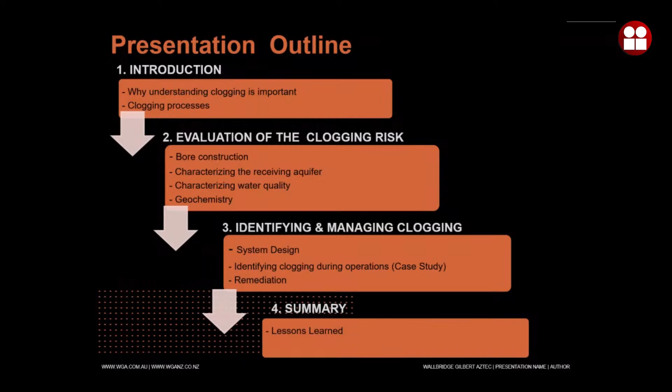The second part will be the evaluation of the clogging risk. Now, clogging risks, we talk about bore construction, making sure we can characterise the receiving aquifer properly, characterising water quality and some geochemistry elements.

Identifying and managing clogging, system design and identifying clogging during operations, and steps for remediation once clogging occurs, and then finally just a bit of a summary of what we've been through.

And why is that changing my slide? Right, for the introduction,

Why is understanding clogging important? Basically, clogging can cause impaired recharge capacity and restricts the volume of water that infiltrates or can be injected to the target aquifer. Severe clogging in infiltration basins or injection bores may need to be replaced, and it's the biggest risk to the successful operation of any managed aquifer recharge system.

What I should have mentioned is that most of this topic will be on clogging in recharge bores. Clogging in infiltration basins is a whole topic of its own.

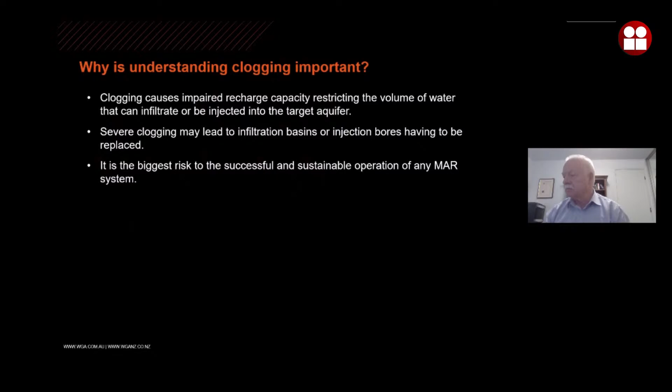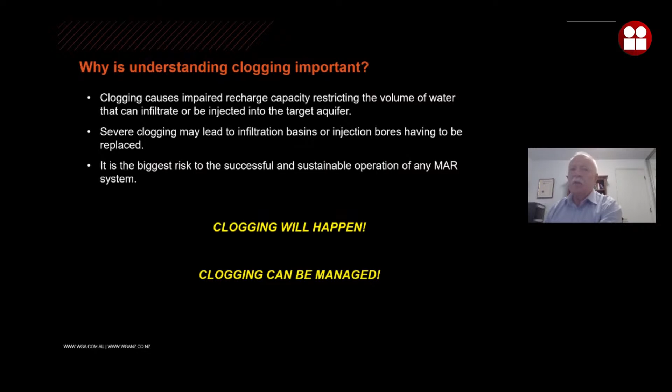Now, clogging will happen. We can be sure of that during the life cycle of a managed aquifer recharge project. But the good thing is clogging actually can be managed. There's a variety of different types of clogging, and I just want to step through each one in particular.

So physical clogging - one of the least appreciated mechanisms is velocity-induced damage, which is migration of the small interstitial fines that occupy the pore spaces within a sand aquifer or another type of aquifer. Under certain flow regimes and high velocity, these fines can actually break off and become mobilised and flow through the aquifer system.

Whilst it's not a problem perhaps while injection is occurring, when injection actually stops, these fines tend to sink to the bottom of the pores, and then when you remobilise injection, they mobilise as a clump and end up being blocked in the small pore spaces, resulting in clogging. It's probably one of the more difficult mechanisms to remediate, but we can put measures in place to control that a little bit better, and I'll talk about that in section 3.

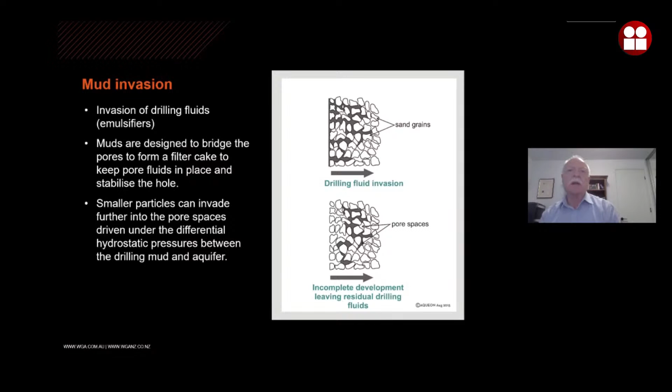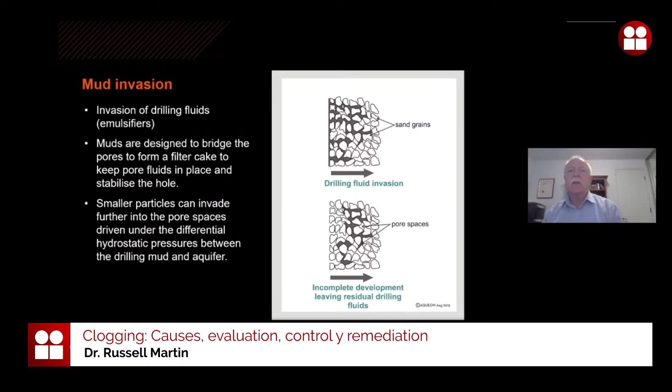Mud invasion, again, probably underrated in terms of a clogging mechanism. Muds are designed to bridge the pores and form a filter cake during drilling and keep the hole open and stable. But it's critical that they're actually removed prior to developing the well, and there's different mechanisms to remove them. If your mud weights and your mud viscosity are not correct when you're drilling a hole using mud chemicals, then they can actually invade out into the pore spaces, several meters or more, particularly if you have a very permeable formation.

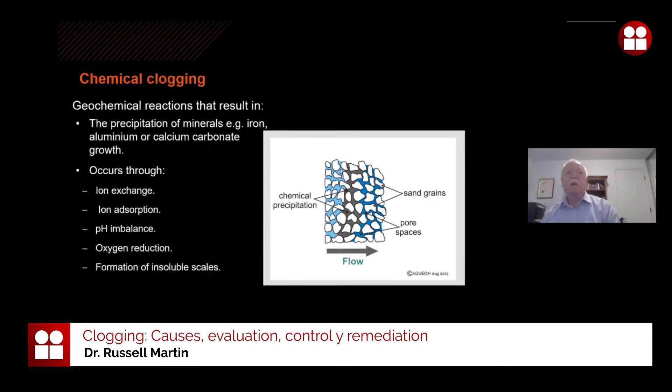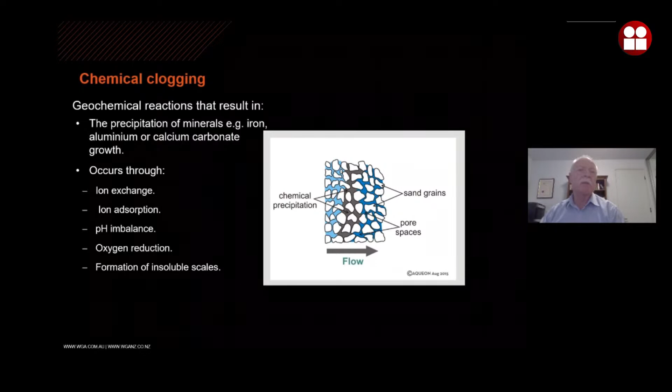Geochemical reactions result in chemical clogging, one of the third mechanisms we can experience in a managed aquifer recharge project. Typically it's precipitation of minerals like iron, aluminium, calcium carbonate. It generally occurs through ion exchange, ion adsorption, pH imbalance, oxygen reduction, and formation of insoluble scales. pH is one of the critical elements we look to control during a managed aquifer recharge operation, because it can help prevent some of these chemical precipitation reactions occurring.

Mechanical clogging basically includes entrained air and gas binding, which can be either through introduced oxygen in the source water, or even from nitrogen or methane from microbiological activity occurring in the borehole. Hydraulic loading is typically another one. If you operate the scheme with excessive pressures and have an open hole construction, you can result in formation failure or perhaps even aquitard collapse, which will cause clogging and reduce injection efficiency.

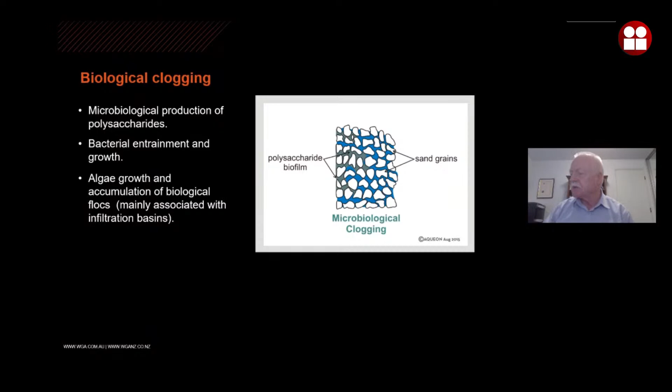Biological clogging is mostly generated by small microbes that typically inhabit the aquifer. So we can have bacterial entrainment and growth within the aquifer, especially if there is a food source available for bacteria like iron bacteria or sulfate reducing bacteria. Algae growth and accumulation of biological flocs is mainly associated with infiltration basins and is a slightly different concern compared to wellbores.

Some of the biogeochemical processes are influenced by chemical type, recharge water source, the temperature, the redox state and oxygen concentration in the groundwater and surface water. Native groundwater microorganisms are actually great for helping improve groundwater quality and achieving some water quality improvements, but they can also result in clogging. The aquifer geochemistry and the presence of co-substrate, dissolved organic carbon - we might have high organic carbons within the aquifer matrix material - provides a food source for some of these bacteria like iron bacteria or in particular sulfate reducing bacteria.

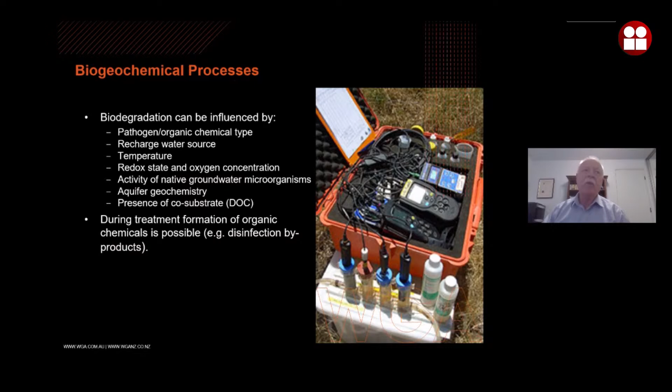Now, one mechanism of treating them, we can look at using chemicals such as chlorine or something similar, but that potentially may introduce another problem in the result of disinfection byproducts that then need to be managed. So again, we need to think about how we might manage and treat these microorganisms.

This is just an example of a change in redox potential, from a case study at a site in Australia, whereby we have a bore construction with a screened interval of around 20 metres, and then the bottom part of the bore is basically a sump to capture any fine material that moves through the screen. We can see we've got a high redox potential that's reasonably well oxygenated in the groundwater passing through the screened zone, but we have this dead zone in the bottom part of the bore.

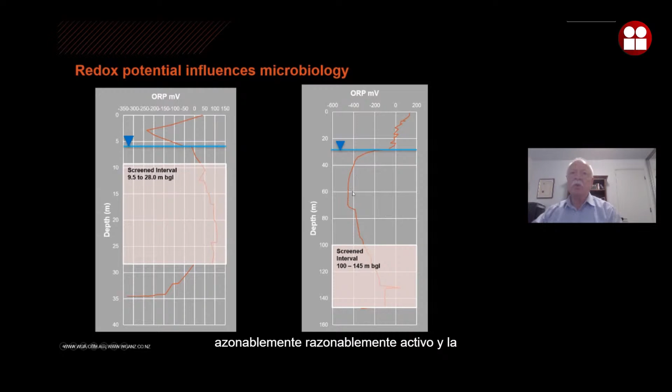When that occurs, it's not uncommon to have both iron bacteria, which likes aerobic conditions, and sulfate reducing bacteria that inhabits these dead zones, which are more anoxic with less oxygen available. So it's quite possible to have both species inhabiting a bore. The example on the right-hand side really shows the screened interval deep in the aquifer, with nice through flow keeping the system reasonably active, while the upper part of the bore, which is not receiving any flow, could induce colonisation by sulfate reducing bacteria.

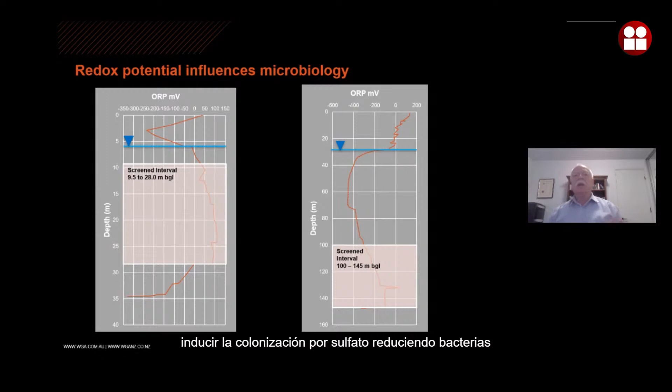This is particularly relevant where the bores might be shut in for periods of time, or inactive for a period of time, either between the point at which they are first constructed versus the point at which injection first begins to occur. I'll highlight that a little bit later on through the talk. These are just some of the oxidation and reduction processes that occur.

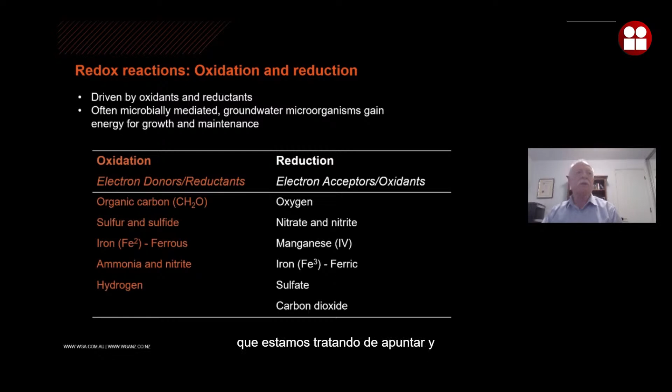They're often microbiologically mediated, and groundwater microorganisms gain energy for growth and maintenance. We can have organic carbon, sulfur and sulfide, iron, ammonia and nitrite, hydrogen, all lead to oxidation type processes. Reduction, if we've got oxygen present, provides an opportunity for organisms to take it up, and therefore we go into a slight reducing environment. Nitrate and nitrite, manganese, iron again, sulfate, carbon dioxide, all of these things combine to change the redox state within the groundwater system that we're trying to target, and can result in clogging issues.

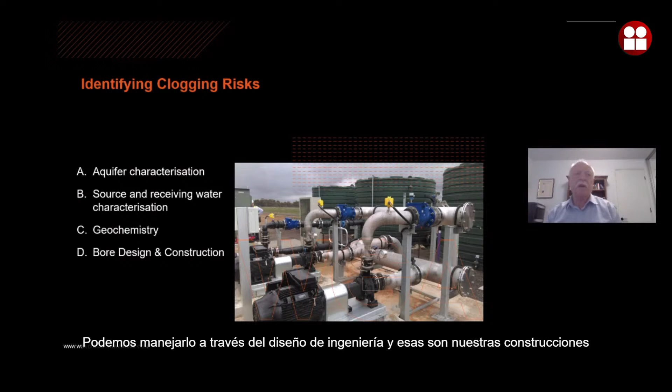So, evaluation of the clogging risk. I just want to go through aquifer characterisation and why that's important to evaluate the clogging risk. The source and receiving water characterisation is absolutely critical. Some of the geochemistry elements and bore design and construction, because there's a couple of different ways that we can manage clogging. We can either manage it through engineering design, that's our bore constructions and additional treatment processes, or we can actually manage it through operational activities.

So why is it important to characterise our aquifer, especially if we're looking at clogging? What we need to think about, and often we don't think about it early enough in the cycle of a managed aquifer recharge scheme, is that clogging generally occurs when we get to the operational phase, so it's not something that we think about up front, but it's absolutely important that we consider clogging right at the outset of our investigations into the feasibility of a managed aquifer recharge project.

If we're looking at an aquifer that has high salinity and we're trying to recharge fresh water into it, we need to think about our recovery efficiency, and that will influence our construction of our bores, our wellfield layouts, all of these sorts of things, which in turn are required to look at where we might get clogging.

We typically have variable aquifer properties across a production bore wellfield that results in preferential flow due to anisotropy. We can have different injection rates between different bores, and therefore the methods of clogging or clogging remediation are likely to be different for each bore. So we need to consider these sorts of activities and how it will change across a wellfield.

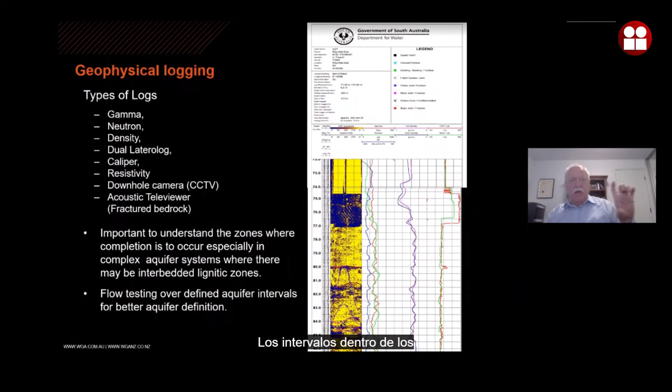In some cases it may be best to actually blank these zones off, and you might have multiple screened zones within the aquifer, but then additional blank zones which are screening these lignitic zones out. The other thing is that lignite can fret quite freely in an aquifer when it's introduced to a different source of water, and therefore result in clogging issues as well. So that's another reason for making sure that we really understand the intervals within which we might have fracture zones, or where we might have different mineralogy across the aquifer system.

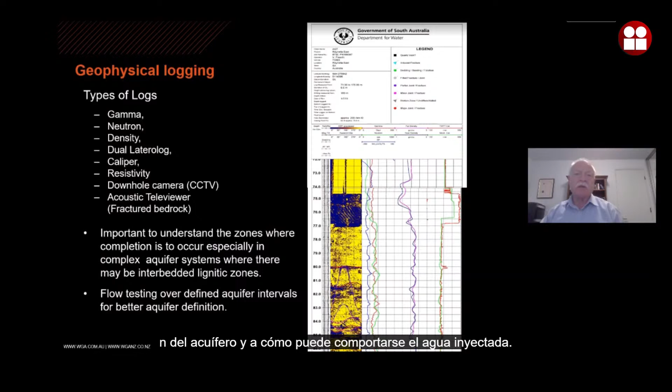Flow testing over defined aquifer intervals leads to better aquifer definition and how the injected water may behave. It's important to do X-ray diffraction, XRF, and scanning electron microscopy to look at what sort of interstitial clay materials we might have that are lining those pore throats, because that may determine that we have to limit the rates of injection so that we don't mobilise these fines and create problems.

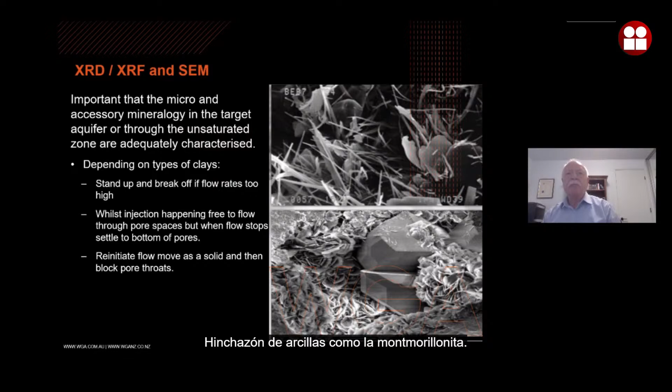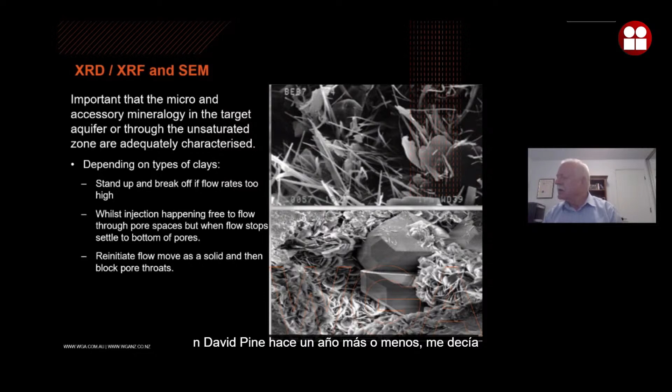Certain clays are highly reactive to fresh water. Illites and smectites, for example, are very reactive. Swelling clays like montmorillonite, if they're introduced to fresh water, immediately swell up, and that'll cause clogging. Although speaking with David Pyne a year or so ago, he was telling me that they have successfully injected fresh water into an aquifer that contains a high percentage of montmorillonite clays or swelling clays, and so through treatment of the source water and chemical balancing, it is possible to recharge into very difficult aquifers.

Cation exchange capacity, again, that's another method that we can use in the laboratory on fresh core samples to help us determine just what the reactivity of the clays within the aquifer are to the potential source waters that we're actually going to be introducing. So a high cation exchange capacity means that you've got highly reactive clays, and therefore appropriate management measures would need to be put into place to actually manage those potential clays and potential clay swelling that may lead to clogging.

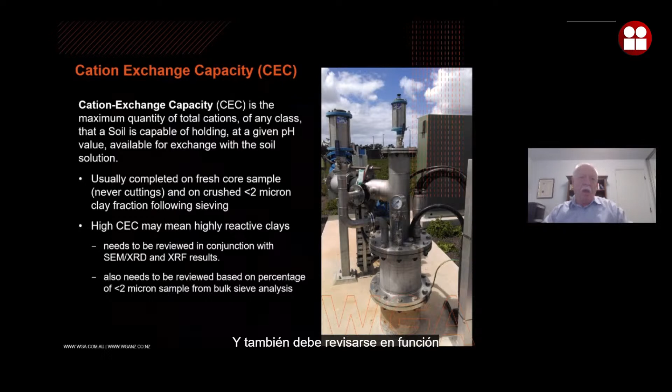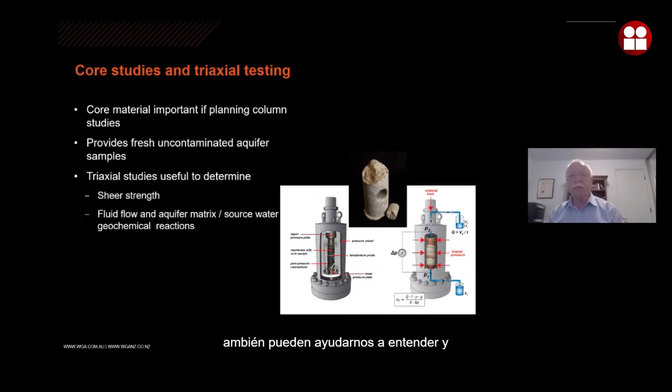If you're doing cation exchange capacity tests, they need to be reviewed in conjunction with scanning electron microscopy work and X-ray diffraction, and also based on the percentage of clays within the sample. Core studies and triaxial testing also help us understand and characterise the reservoir or aquifer better, and look at the potential risk of anisotropy, and how we might design our well field.

To optimise both recovery and the options for managing clogging, I should stress you don't need to do all of these tests when characterising an aquifer - it's very much site specific. This is just an example of the types of testing that can be done.

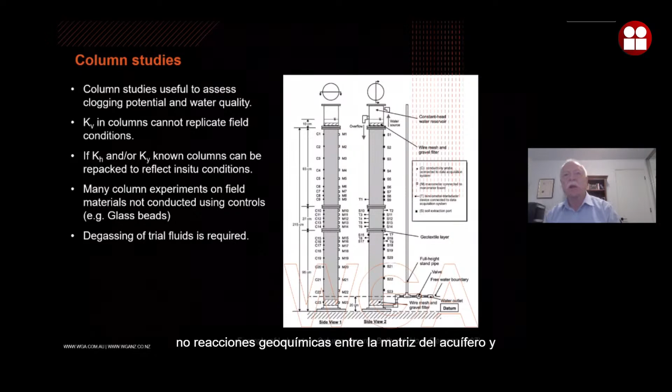Column studies are another good method to assess clogging potential, using both aquifer material and various types of source water. This is very cost-effective for testing the aquifer matrix and whether there are likely to be geochemical reactions between the aquifer matrix and source water that might lead to clogging, or for looking at options to

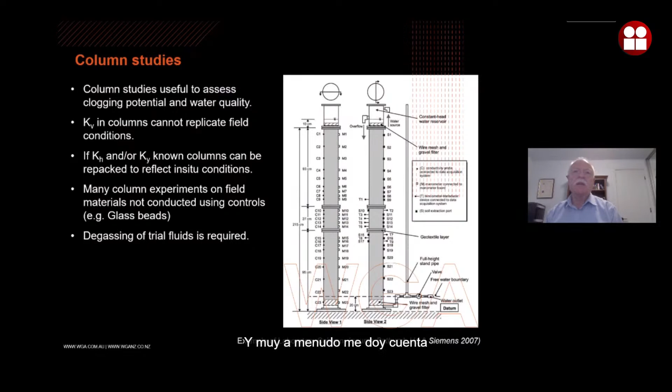chemically treat the source water to prevent some of those clogging reactions happening. There are some issues with column studies - it's difficult to always repack the columns the same as you'd get in the aquifer situation, and quite often I notice a lot of column experiments aren't actually done using a control. They'll use different core matrices, rock or soil samples in the column, but it's also useful to have a control such as glass beads to compare the different treatment processes, giving better

confidence in the changes in chemistry that might occur due to aquifer matrix reactions or source water quality reactions. Any fluids used within the column experiments should potentially be degassed - that seems to be one of the things overlooked in column experiments. Try to remove as much oxygen as you can, because you don't want to introduce additional problems that may not be apparent in the actual physical field at the site.

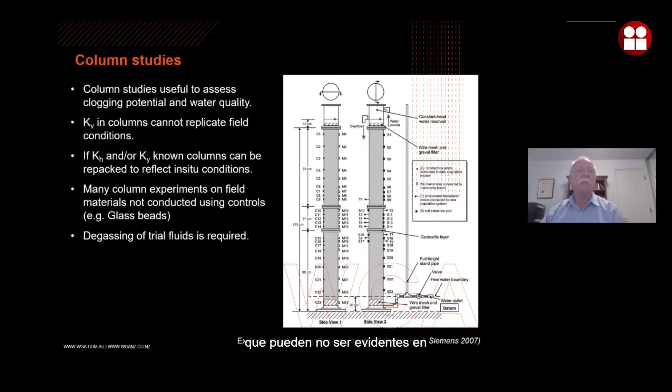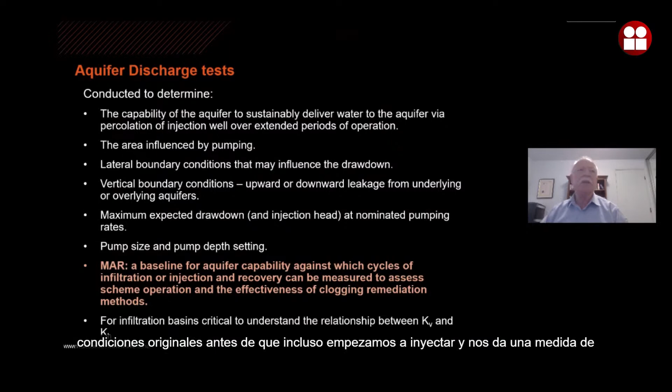So it's absolutely critical to do, as a minimum, a step drawdown test in the proposed injection bores to provide that baseline measurement. It also gives us a measurement against which we can test the effectiveness of any remediation strategies we might put in place, to make sure we've got something back close to the original conditions before we started injecting, and a measure of how effective our remediation strategies have been.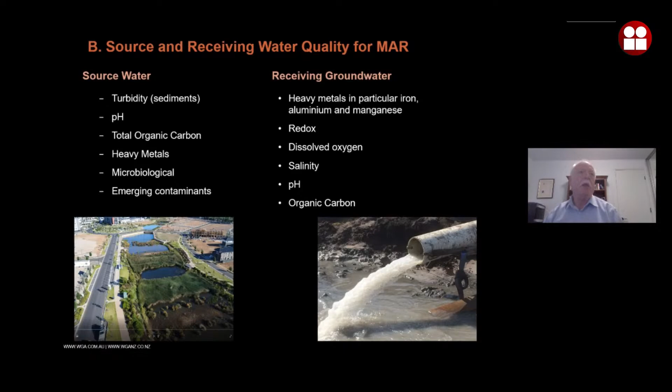Turbidity - obviously we want our source water as clean as we can possibly get it to prevent the introduction of interstitial fines. Even if you have suspended solids of around 5 to 10 milligrams per litre, and you inject at around 20 litres per second, you're always putting something in the order of 10 to 15 kilograms of suspended material into the aquifer. So it doesn't take very long to actually clog the aquifer.

You can do simple testing like membrane filtration index testing of the source water to work out what quality and what target suspended solid levels you might need to achieve prior to injection. That will inform you whether treatment mechanisms like wetlands or passive treatment can achieve those targets, or whether you might have to introduce additional mechanical treatment and filtration methods to achieve the source water quality needed to prevent clogging in the bore.

pH variations result in the formation of scales - carbonate, sulfides, gypsum, etc. Complex iron - pH can cause iron to precipitate out, especially at elevated pHs. You can balance pH and keep it below 7, in that 6 to 7 range, to prevent things like iron precipitation, which then becomes a feed source for iron bacteria.

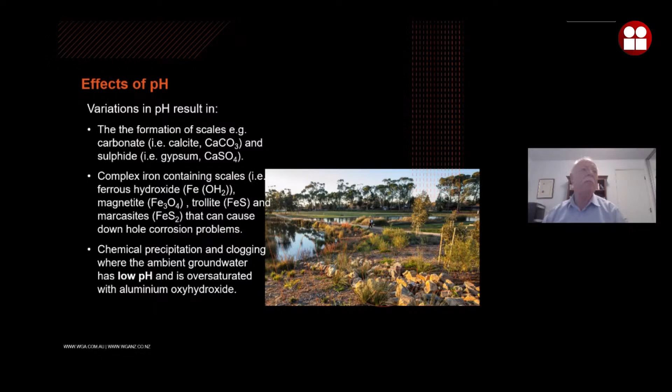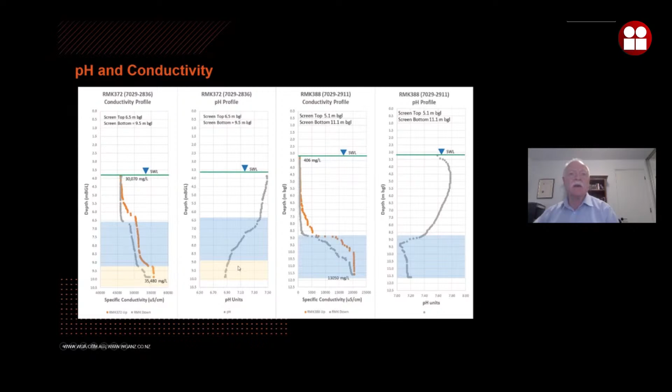Total organic carbon - high total organic carbon basically induces clogging because it provides a feed source for microbiological activity. High sulfate is generally a result of organic carbon, and that can provide a feed source for sulfate reducing bacteria. Sulfate reducing bacteria produce H2S, which can corrode steel and metal casings and cause other associated unwanted issues.

Hydrogen sulfide gas is that rotten egg gas. It's only in very small concentrations you can smell it. In high concentrations it can actually be lethal - by high concentrations I mean in excess of 30 parts per million. Generally you can smell it at less than 5 parts per billion. It's that horrible rotten egg gas you might smell when you take the cap off a bore that's been sitting idle for a period of time.

Organic carbon removal by microbiological activity basically accelerates the clogging process on infiltration basins, and it can also accelerate clogging in bores because sulfate reducing bacteria produce quite a slimy residual waste, and that slimy waste will just coat the insides of the screens or coat the formations.

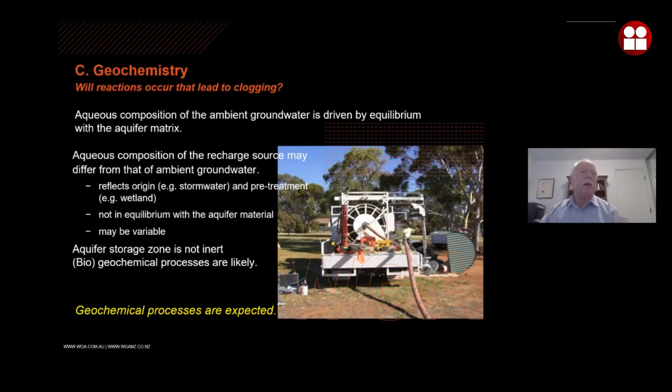Reactions that are likely to affect water quality include mineral dissolution and precipitation, ion exchange, and redox reactions we've already been through. The significance of these reactions will vary both in space and time, depending on the physical porosity and permeability of the aquifer, and the geochemical heterogeneity within the aquifer.

Source water quality, particularly if you're dealing with stormwater, is highly variable through a season, and therefore at different times, different flows and different reactions can occur over time.

We operated several schemes quite successfully for a period of sort of 5 or 6 years. Then we had a really dry winter. When the next year came, with very hot, dry summers, our natural surface soils have a high aluminium content.

When the next recharge season came around, we were seeing lots of re-injection water with very high pHs, typically 8 and above. And when we injected those into the bores, we were experiencing a lot more iron precipitation and a lot more issues around clogging as a result of that change in source water conditions.

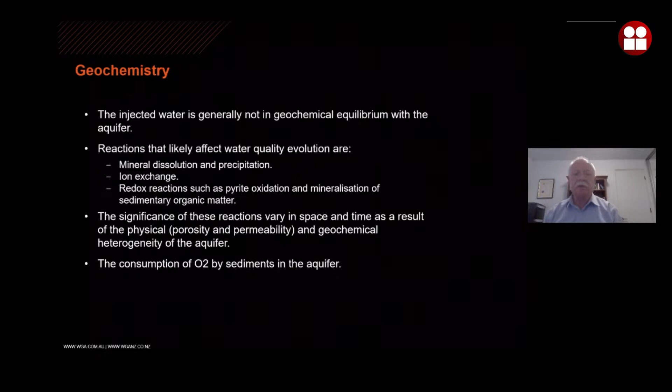So what information do we need to assess the risk of geochemical processes? We need to understand our recovered water quality. We need to understand the source water quality and the native groundwater quality, and any variability within the storage zone.

Like I said, in that particular example I gave before, we have fresher water salinity stratification through the aquifer, and quite a different pH between the upper part of the aquifer and the lower part of the aquifer.

We need to understand the mineralogy. We need to understand the quality of the groundwater in the storage zone and how that might change during managed aquifer recharge. The best way to do all of this is through running hydrogeochemical models such as PHREEQC, looking at the saturation index.

and looking at where you may have an issue with oversaturation of things like iron. It's also important to look at the different iron species - iron 2, iron 3 and total iron. It's quite important to look at the organic carbon, dissolved oxygen, and those sorts of water quality parameters.

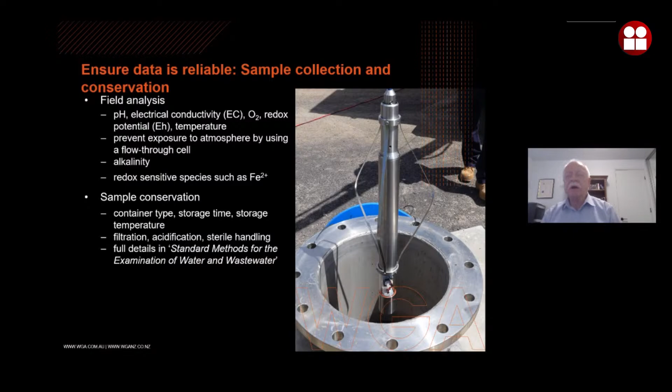How much iron is too much iron in a bore? That's always a good question. I've seen iron precipitation occur where concentrations have been in the order of 2 milligrams total iron per litre.

I've seen other cases where we haven't got iron precipitation and it's been as high as 5 or 6 milligrams per litre. Australian groundwaters are naturally rich in iron in a lot of places - you can get iron concentrations up around 12 to 15 milligrams per litre total iron concentration.

They do tend to cause problems, but it's very variable, and with precipitation of iron there's no one rule that says we're not going to have an iron problem if the concentration in the groundwater and in our source water is less than 2 milligrams per litre. A lot of other factors come into play.

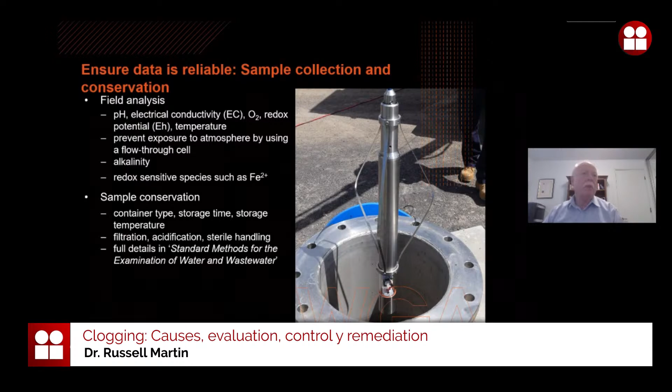They can also result in those food sources for various microorganisms.

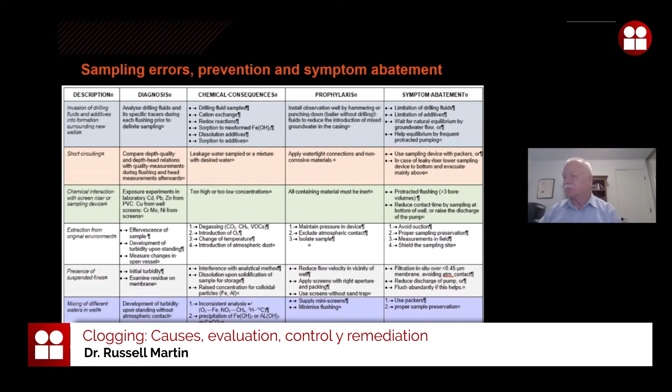Iron reactions can occur very fast and clogging can occur very quickly. Manganese precipitation typically occurs much slower. Both of them can be accelerated by microbiological activity and where we have an oxygen reducing environment.

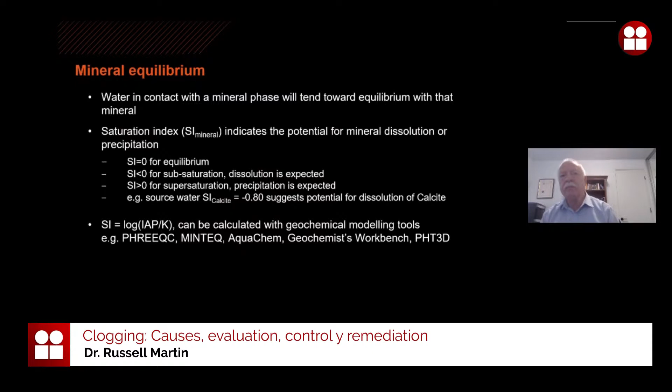Water in contact with a mineral phase tends towards equilibrium with that mineral. Again, this is where we look at our hydrogeochemical modelling between our source water and receiving water, and also understanding our aquifer matrix. Some of the hydrogeochemical modelling software, PHREEQC, MINTEQ, Aquachem, Geochemist Workbench, PHT3D, are all suitable modelling packages that can look at those geochemical reactions that may occur between the source and receiving groundwater.

The native groundwater iron total was about 1.6 milligrams per litre. The source water iron total had a median of about 0.45 milligrams per litre. The recovered water iron ended up with a median of around 0.36 milligrams per litre. The increase in iron was predominantly due to the release, dissolution and oxidation of pyrite within the aquifer.

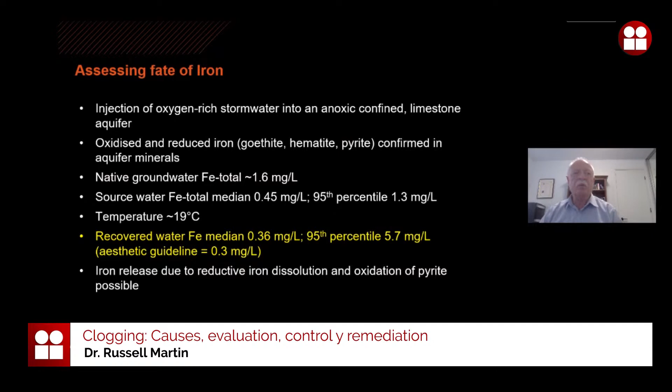So that was the outcome of our geochemical evaluation, looking at those different source and receiving water iron concentrations, and therefore we've determined that we're going to potentially have an iron problem, which could result in sulfate reducing bacteria or the development of iron flock within the borehole, which would ultimately lead to clogging if it wasn't managed effectively.

This gives a decision tree to identify the potential for iron mobilisation. You can work through this decision tree and work out whether or not you'll have issues with dissolution of iron oxide or increased iron in the recovered water that may need treatment.

One of the byproducts, if you've got a lot of pyrite in your groundwater system, could be arsenic, which would impact on the quality of the recovered water and what you can actually use that water for once it's recovered.

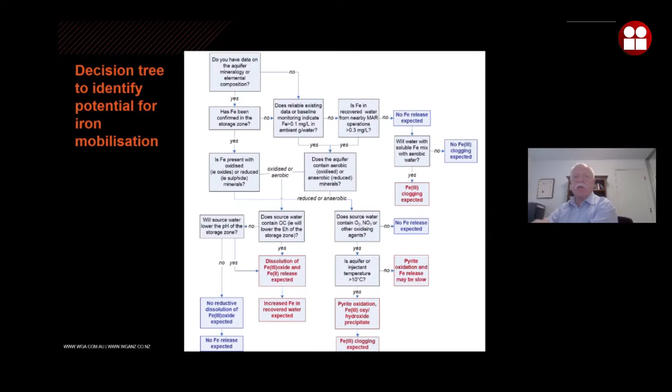It's a simple thought process that you can go through to work out whether or not you need to do any further detailed geochemical modelling, potential characterisation of the source waters, and leads to decisions in terms of how you might want to treat the water prior to injection.

Recharge bore design and construction. Again, thinking about how we construct the bore has implications for how we're going to operate the scheme, and also how we might mitigate any clogging that has occurred during operation.

If we've got a screened bore, it limits the opportunities for remediation, and also it can limit the injection efficiencies within a bore, because once you've got a screen in place, it will start to increase the natural well losses. So therefore, the rates at which we can inject may be reduced.

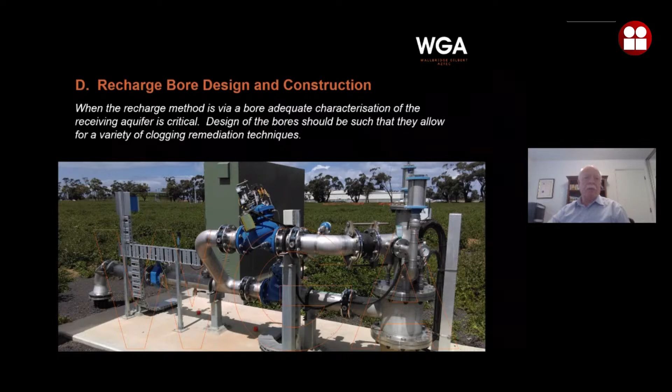We want to design our bores to make sure we can have as many options available to us to remediate the bores in the event of clogging. We've got to remember that the bores used in Managed Aquifer Recharge, or ASR, where we're using the same bore for injection and recovery, are not simple water supply bores. A little bit more care and attention is needed when we actually construct them.

Unlike conventional water supply bores, re-injection bores may have to withstand considerable operating pressures. So we've got to consider what sort of materials we're going to use, how we're going to grout and cement the casing in place. We need to consider the drilling methods and drilling fluids.

If we're drilling with mud, are we going to have problems with the mud recovery and cleaning it out? What are the pressures that we're going to be using during injection? This leads to selection of materials that we might use. What's our screened interval or our production zone?

What's our design going to look like to remediate clogging should it occur? We need to consider bore conditioning and development ahead of any recharge that might occur, ahead of any shut-in periods where the scheme might be idle for a period of time, and then again bore conditioning and redevelopment ahead of any re-injection after a period of time where the bore's been shut in.

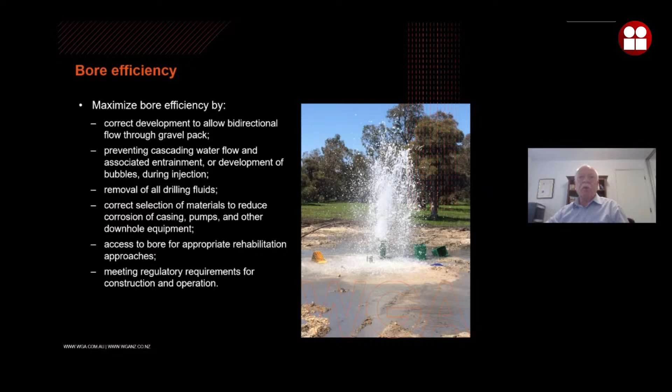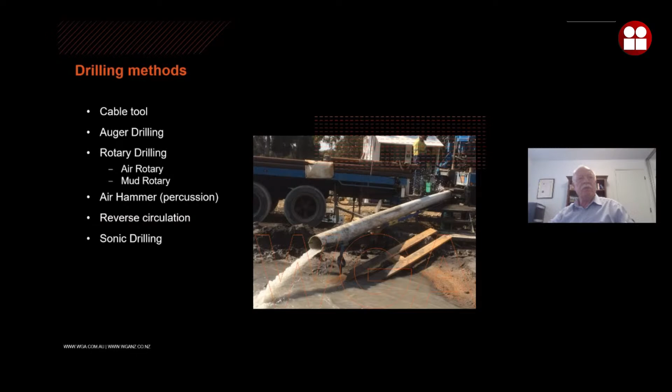We want to control the drilling process with proper mud control. We want to use experienced drillers who are familiar with ASR systems or have drilled ASR bores before, or we want to sit down with our drillers and make sure they understand the objective of the bore - that it's not just a simple production bore. It needs to both inject and extract groundwater, which means a slightly different construction. We also want to make sure there's proper development on completion of the bore, meaning enough airlifting and development that won't create additional issues in the longer term or leave residual muds or other drilling fluids down the hole. We get rid of muds using revert chemicals that help break them down so they can be developed and removed.

Types of completion: open hole, which is great where you've got a competent formation that will stand open, and that leads to lots of different methods for bore remediation. Natural gravel pack is probably the next best method, whereby you put in a telescopic screen and just let the formation fall back against the screen. Gravel packs and screens are probably my least favourite method, but in some formations it's totally unavoidable and required.

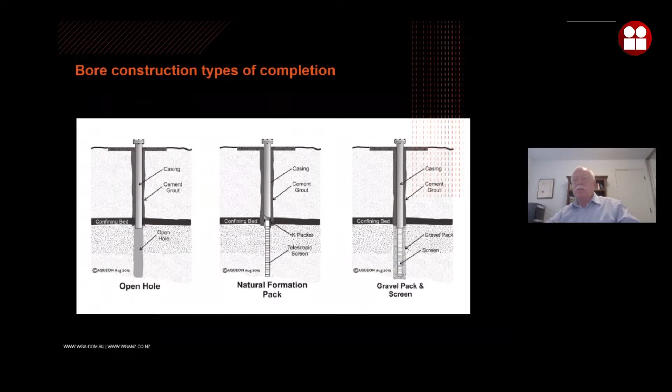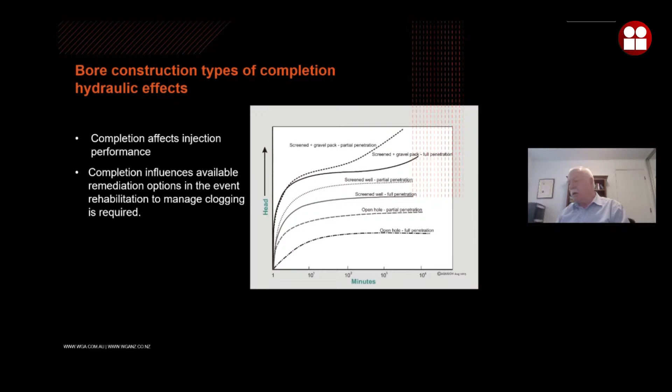Screens and gravel packs also limit the options for bore remediation, as I said, and they also limit the injection pressures and injection rates you may be able to achieve. Just to give an example of the hydraulic effects of the different methods: open hole has significantly less well losses involved. Once we get up to a screened and gravel pack well, that can add around 7 or 8 meters worth of head during injection, or 7 or 8 meters of extra water pressure, simply through trying to force water through the screen and gravel pack. So they do influence the well loss and also the remediation options.

Construction materials ideally want to be inert, typically PVC, fiberglass reinforced plastic, or stainless steel. Just bear in mind that if we're using stainless steel in an anaerobic situation where we might get sulfate reducing bacteria, hydrogen sulfide gas can react with the stainless steel, causing pitting and corrosion or increasing the corrosion.

We don't use mild steel casing if we can avoid it, because the active zone across the wellbore may be exposed to oxygen due to drawdowns during pumping and recovery, and impressed or injection heads during injection. That zone is quite active, and over a 30-40 meter length of steel that gets oxygenated, opportunities for corrosion arise. Things like rust can start to occur over time, and will ultimately lead to clogging.

Generally in screened wells, clogging occurs close to the screen or in the gravel pack. Therefore rehabilitation is often needed more frequently, due either to chemical precipitation, microbiological growth, or accumulation of particulates from the recharge water. Our remediation or operational strategies may necessitate significantly more frequent backwash events, possibly even daily, to maintain injection efficiency and prevent clogging.

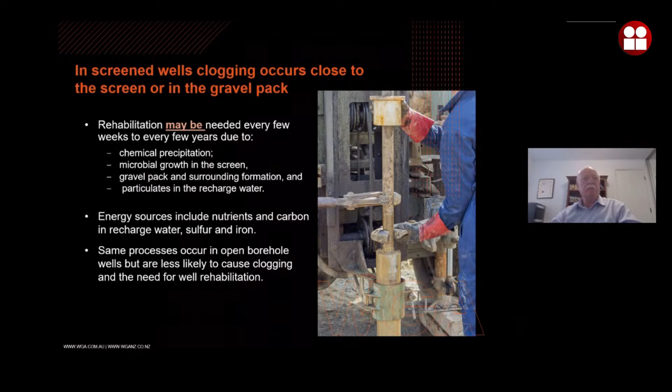If we've got an open hole completion, it's really important to make sure that we develop the bore up well, that we get rid of all of the fine sands. We're not continually producing sands, especially where we might get issues of dissolution.

Conventional airlift development first. There's often a question I get: if we're doing an airlift development, aren't we just simply introducing oxygenated water into our groundwater system and oxygenating that near wellbore zone because we're forcing air down the hole and then developing it? What we've got to think about is the process of that air development.

It's a surging process, so it surges and displaces water out of the bore using air, and then there's another inrush of water from the formation that will bring any entrained air with it and discharge it. However, there's often some small air trapped behind, so it's absolutely important that a pumping test is conducted as soon after the well is developed as possible.

If we run these aquifer discharge pumping tests for a 24-hour period or so, and measure parameters like pH, redox, and dissolved oxygen while pumping, that gives us a good indication of when we've got equilibration and native groundwater being produced, and we've got rid of most of the oxygen. Therefore we can reliably determine that we don't have highly oxygenated water left in the aquifer as a result of the airlift development process.

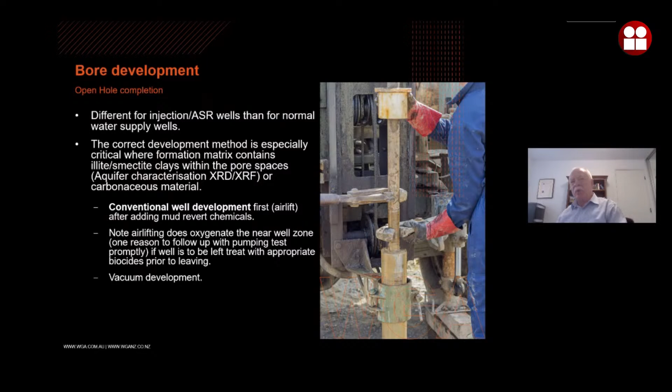then we can develop the bore following completion using a vacuum approach, almost a Venturi system, which creates a vacuum and can clean out all of the fines material.

If we're just using a natural formation pack and a telescopic screen, we can use conventional well development: airlift after adding the mud revert, followed by pumping development. We can use injection recovery slugs for screened and gravel pack bores, which means cycling fresh water and recovering it over a period of time, in a stepwise development with incremental volumes and rates of injection and recovery, using almost an injection/recovery process to develop the bore. It's a cyclic development to make sure we get that bi-directional flow through the screen and the gravel pack.

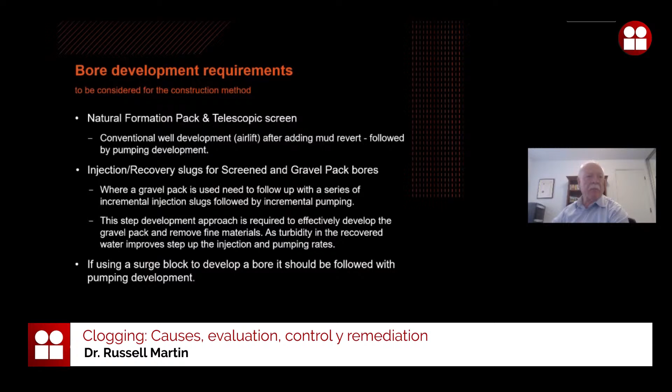Surge block development is another way of developing a bore. If it's used, it really should be followed with a pumping test and pump development to make sure that all of the air is out of the system.

So during operations, how do we identify and manage clogging? We can manage clogging in injection bores, and the reason we do this is because it results in extra operational and maintenance costs, and we want to make sure we don't have to replace any of the injection bores. If it's not recognised in time, it'll certainly cause loss of production capacity and lost harvesting opportunities, especially if your source water is stormwater.

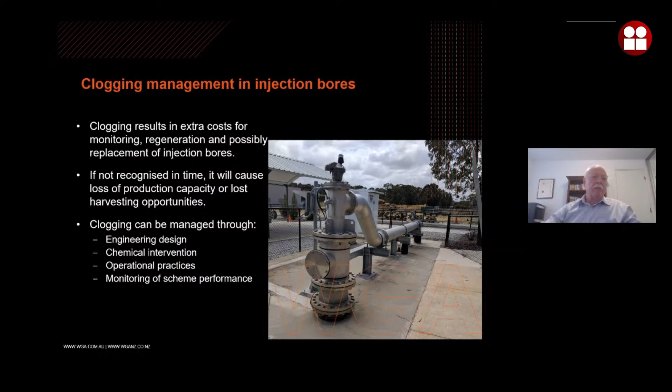We can manage clogging through engineering design, chemical intervention, operational practices, and importantly, monitoring the scheme performance. We need to consider sediment loadings, heavy metals, pH, total organic carbon - in short, our source water quality and receiving groundwater quality. How do we recognise clogging?

Basically, the hydraulic response in the injection bore is the best way to recognise clogging. This gives some examples: over a short time, a rapid head build-up in the injection well might be indicative of gas entrainment.

Over time, we might see a gradual change suddenly becoming an exponential rise in injection heads for the same injection rate, which might be indicative of microbiological clogging where there's an abundant food supply. We might see a tapered effect where there's a limited food supply and some initial microbiological activity, which then drops off after a period. Suspended solids typically show a gradual build up in head over time for the same injection rate.

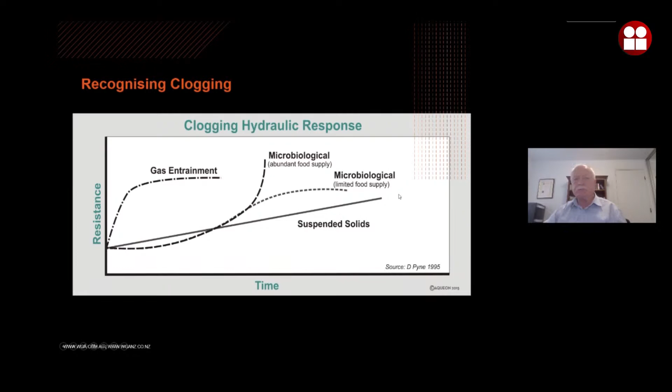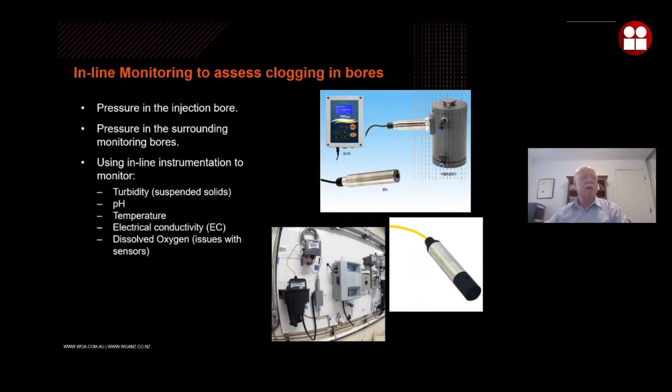To assess this, we want to make sure we've got the appropriate inline monitoring. We want to look at the pressure in the injection bore, and have monitoring probes with pressure transducers in the surrounding bores used for monitoring, plus inline instrumentation to monitor turbidity, pH, temperature, electrical conductivity of the source water, and sometimes dissolved oxygen. However, we've found over time that dissolved oxygen probes foul very frequently, causing issues and off readings, and the system is often down more than not if you're using dissolved oxygen as an indicator. So we've dispensed with using DO probes inline because of the problems they've caused over time. Generally it's turbidity, pH and temperature that are the key things we need to look at inline in terms of source water quality.

Just a quick case study looking at well screen clogging over successive injection cycles. Specific capacity is a great indicator of whether a screen is clogging due to chemical or mechanical issues. Screen clogging is characterised by increasing resistance or increasing head over time for a continuous or constant injection rate. Wellbore clogging is characterised by entrance resistance that increases slowly over time. That's the examples given in the previous slide, looking at injection heads over time for the different types of clogging.

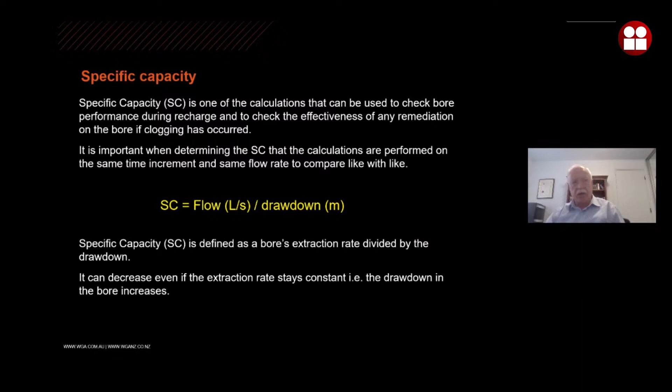Specific capacity is one of the calculations used to check bore performance during recharge and to check the effectiveness of any remediation on a clogged bore. It's really important to calculate specific capacity at the same time step and at the same injection rate, otherwise you can't compare. So if you're comparing the specific capacity for an injection rate of 20 litres a second, it should always be done at 20 litres a second, and the time step might be after the first 50 minutes or the first 100 minutes of injection, but that time step should always be constant and always the same. Otherwise you can't compare apples with apples.

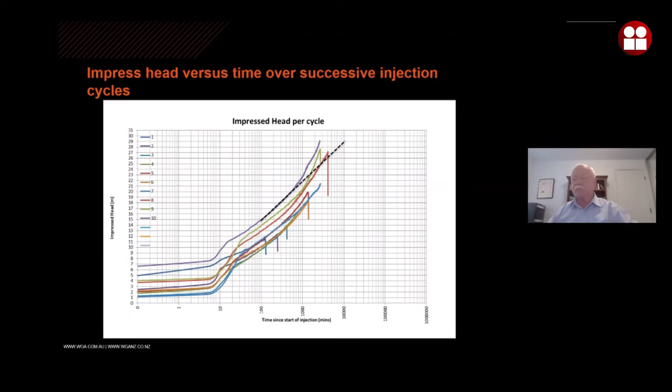You can also look at the chemistry of the recovered water to determine whether or not there's a clogging issue. Typically, elevated iron hydroxide is the thing we're looking for in the recovered water, if it's significantly different over time.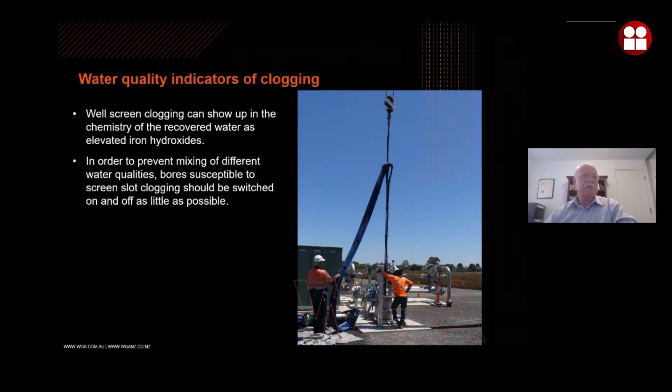Control of air entrainment - the only way we can do that is with a downhole flow control valve. They're typically installed where we have a significant depth to our standing water level in the bore, or we are injecting at really, really high rates, because the high rates enable us to use both the rising main and the well bore annulus to inject those volumes.

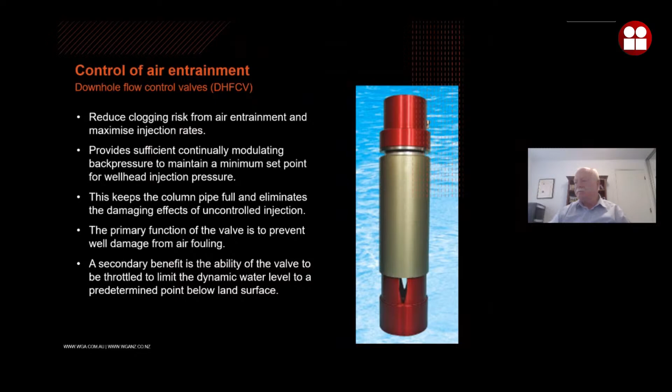Or if we have a limited internal diameter, that's where we might use a downhole flow control valve. The rough rule of thumb is if the standing water level is greater than 20 to 30 metres below the top of the casing, you may need to consider using a downhole flow control valve to prevent water cascading in the bores.

For remediation, we've got mechanical techniques, physical techniques, and chemical techniques.

Mechanical techniques may include backflushing, and the frequency of backflushing really depends on the source water quality and bore construction. It can be daily, weekly, or maybe even once a year.

We can use intermittent pumping, surging methods, or vacuum methods, or in an open hole situation, reaming or under-reaming is another method to actually manage the injection.

Ramping up and down of submersible pumps can also help, but that's fairly hard on equipment.

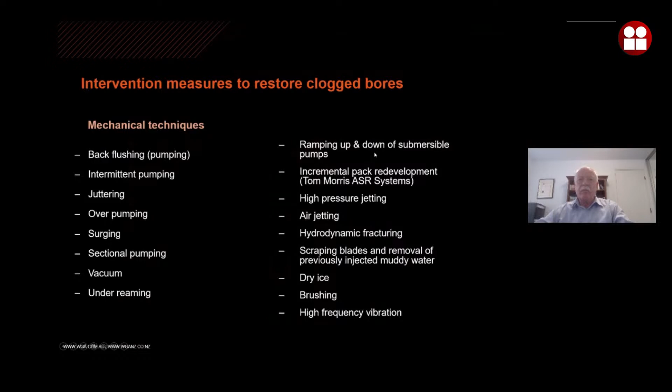Physical techniques - we can pasteurize our water, disrupting chemical and microbiological processes by freezing and pumping. I've only ever heard of that being done in one place in Europe; it's not typical. Chemical techniques include chlorine, acidization, and other methods are other issues we need to look at.

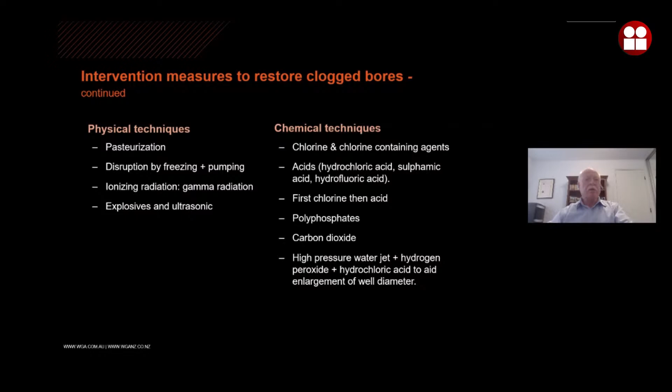Water treatment options to mitigate clogging in bores: strainers, filtration, micro or ultrafiltration are typical mechanical methods we can use. Disinfection - we can apply chlorine, chloramine, ozone treatment, or additional UV treatment to manage microbiological activity. pH buffering is another mechanism to manage the risk of chemical precipitation. All of these engineering solutions can be added onto the system design.

Some additional filter options - if there's a lot of organic carbon in the source water, we can use activated charcoal. Activated carbon can also be used to manage emerging pollutants in source water, such as PFAS. However, the activated carbon needs to be reconditioned periodically, and if there are things like PFAS in the water, it's sometimes difficult to dispose of and recondition the activated carbon.

I've mentioned a couple of times throughout the presentation that we need to consider bore conditioning. That conditioning involves making sure that when we first start up the scheme, the pipeline supplying the bore headworks is fully charged and free of any air before we inject into the wellbore.

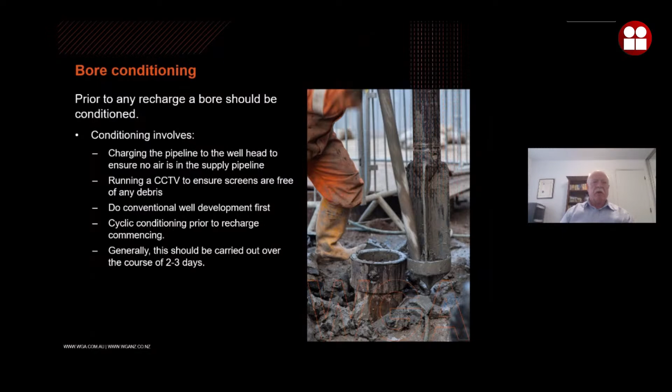We might consider doing some cyclic conditioning prior to recharge commencing - just small volumes, low rates, inject, extract, and incrementally increase those, which is what cyclic conditioning is. If we do use cyclic conditioning, it should be over a period of 2 to 3 days.

Some operational measures to mitigate against clogging: flush all the wellhead and piping prior to any recharge, especially at the beginning of recovery, for a few minutes - that can be just a few minutes or an hour. Periodically backflush the well.

Again, what we've found over time is that prolonged backflushing at a single rate doesn't really do much. Most of the backflushing occurs in the first 15 minutes, so between 15 to 20 minutes is about as long as you need to run a backflush event to remove any accumulated solids or biomass.

Our typical backflush frequency is every few weeks to a month, but we have been operating a scheme where backflushing is required every day - though again, it's only for 15 minutes a day. The same pump installed in the bore can be used for backflush and recovery.

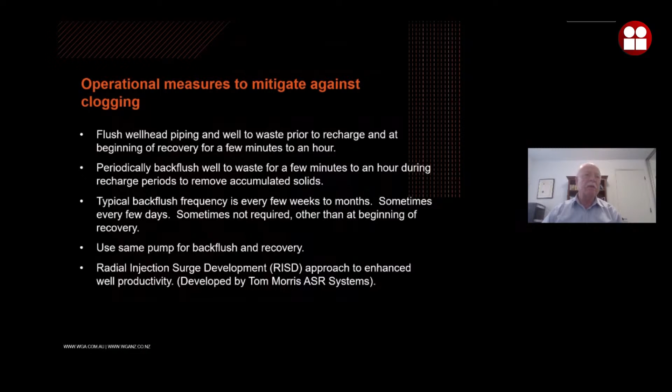We can use the radial injection surge development method, which was developed by Tom Morris when he was at ASR Systems in the US. That's a very effective means for developing clogged bores.

How do we control some of that microbiological activity? Chlorination or UV of the source water before it goes in. Ozonation is another method that can be used, but that increases infrastructure costs. A number of our schemes have UV treatment where they don't have sufficient residence time through a wetland, which applies all that passive treatment.

Wetlands, if you're looking at those as a passive treatment mechanism, probably need 8 days residence time of water flowing through to achieve a 2 log removal of microbiological activity. If the water is to be supplied for drinking supply, you'll probably need to attain a 6 log removal - that can't be achieved by chlorination alone. So you may end up having to use a combination of treatments such as chlorination and UV treatment, or microfiltration, if the water is for a drinking water supply.

Remediation methods such as acidization. We've achieved a couple of, we've done sort of about 5 or 6 bores that have required acidization to remediate clogging. Generally, it's a kind of a last step resource, but because the aquifer was a carbonate aquifer, it was favourable, the conditions were favourable to use hydrochloric acid. Basically, in a carbonate aquifer, it results in the production of CO2 and water, so there's no residual hydrochloric acid.

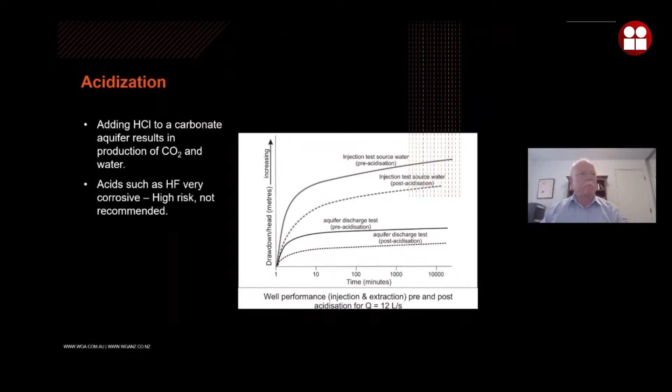That's what we ended up with, was that sort of greeny black sludge. We did a jetting and brushing of the bore. We repeated that chemical dosing and then did the vacuum suction and cleaning to remove any residual debris from around the production zone. Reinstalled the pump, scoured and surged, and then repeated the step drawdown testing to confirm that the rehabilitation approach was effective and efficient.

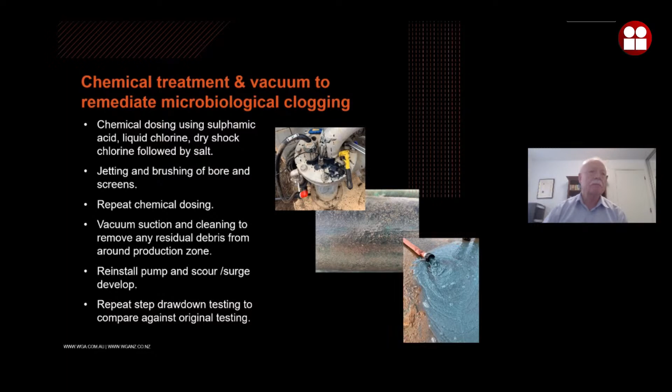Some of the lessons learned over sort of 20 years of managed aquifer recharge into bores: clogging will happen, but it can be managed. To recognise the potential for clogging and to mitigate, we either do that through engineering design or through operational management practices. And that's really why we do need to understand the risk of clogging up front and consider that in all aspects of our design and through the investigation stages of our managed aquifer recharge scheme.

So that we know whether or not we're going to have to install additional treatment above ground on our source water, or whether or not we can successfully manage the clogging potential through just operational practices.

Hydraulic performance of the injection bore is one of the keys to assessing ongoing clogging during operations. Knowledge and skills are required to remediate clogging, getting contractors that have the right sort of equipment and are familiar with treating bores. The treatment chemicals that are used are quite common for treating production water supply wells, so there's nothing new. They're generally accepted by regulating authorities such as the EPA, so there's no lasting environmental harm in using these chemicals that we use for remediation.

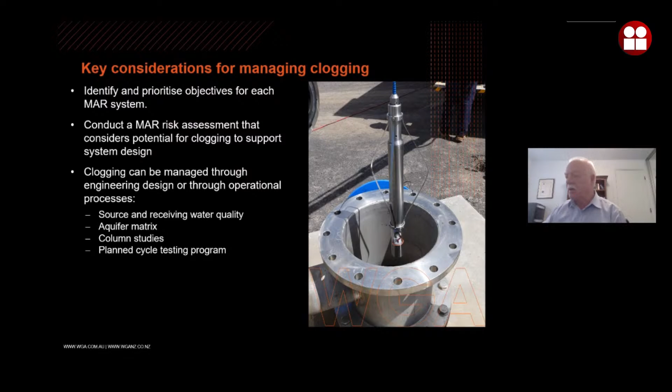Source and receiving water quality, understanding our aquifer matrix. We can use things like laboratory studies, column studies, etc. to help us understand that risk of clogging, and we can have a planned cycle testing program that'll help us understand that risk of clogging.

The main causes of clogging in ASR bores or managed aquifer recharge bores is poor well construction, poor characterisation of the source and receiving waters, poor characterisation of the aquifer mineralogy, and poor well design. Often there's inadequate development post completion, and then failure to adequately condition the bores prior to commencing recharge after a period of shut-in where the bore's been idle.

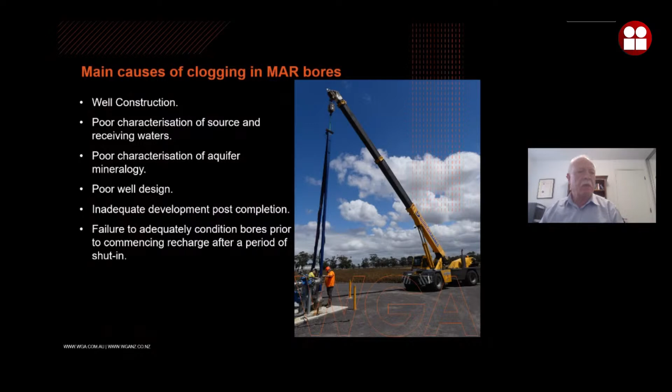Often everybody just turns around and says, oh, the system's all connected together, it's just a matter of turning on the pump and allowing and then starting injection. But quite often it's best to actually start pumping the bore before you do any re-injection, and making sure that it's properly conditioned and the system is properly conditioned, so that you're not introducing bacteria or other materials that may have grown in the system while it's been idle.

Some of the engineering considerations: we can use filtration, simple sand filters to membrane filters, activated charcoal, UV treatment and chlorination. Downhole flow control valves, where we have significant depths to water and large volumes required to be recharged. Addition of chemical processes to buffer and balance pH.

Just a reminder that the ASR bore is not a simple production bore. We need to make sure that the material selection we used in construction is appropriate. The drilling method to construct the bores is appropriate. We've got proper completion and we've got proper development of the bore.

Make sure we collect those baseline aquifer parameters, that step drawdown test, do the specific capacity, and that should be determined on all production bores. Constant rate discharge tests, maybe 20% or 30% of a well field, that should be completed.

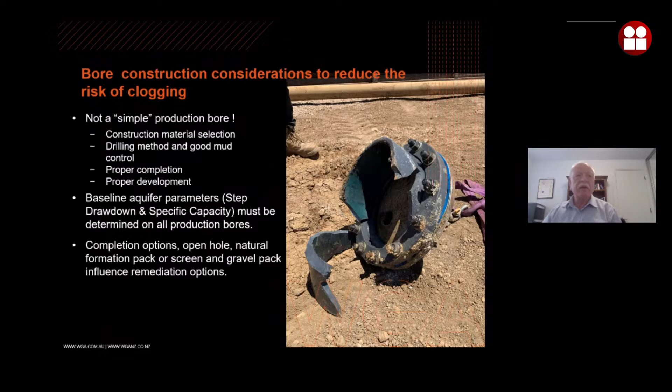Consider the completion options for the possible remediation strategies in the event of clogging. So open hole, natural formation pack, or screen and gravel pack. Remediating a screen and gravel pack is obviously more costly than remediating an open hole when we're looking at managing clogging.

During operations, consider backwashing cycles. How frequent do they need to be? Periods of dosing. You may not need to install constant chlorination to manage the risk of clogging and manage any microbiological activity. So it might be that periodic shock dosing of the bore every 3 to 6 months will be sufficient to actually control any microbiological activity, rather than investing in chlorination units.

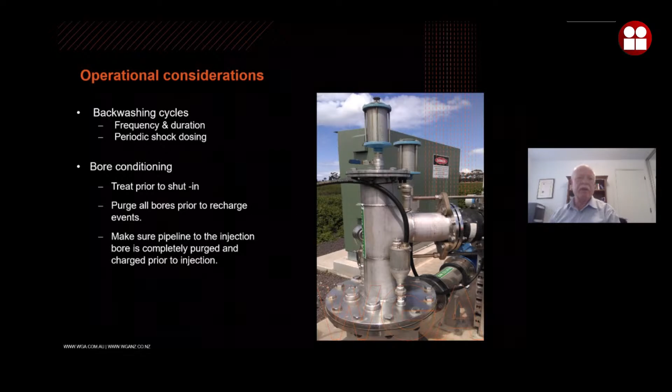We want to make sure that we condition the bore, treat prior to any shut-in periods, which means dosing with an approved biocide chemical, purge all bores prior to recharge events, and make sure that the pipeline to the injection bore is completely purged of any air and stagnant water prior to injection. And that's me finished.